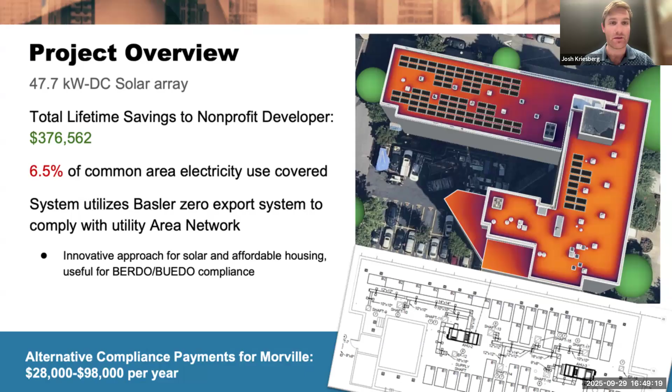So Josh, I could talk a little bit about this piece. The total project cost for us is $242,759. Now we've already secured a federal tax credit for half of that, so we got it for $121,379, just leaving us with the other 50% of the cost. Now the amount we're requesting from the fund is just a few thousand more than the remaining cost of the project itself, and that's really just to cover the overhead, the small amount of time that Episcopal City Mission and Morville staff will need to manage the project.

Now, before we jump back into another technical slide, let's talk about the recipients of these efforts, the tenants here. We currently have about 230 residents in the building. This project, all the energy from the system is going to be used to offset the common area electricity in the building. Per the bonus tax credit, we're required to distribute a portion of that energy output to tenants. So Episcopal City Mission is going to be contributing extra monies into the building's operating reserve to accommodate for this.

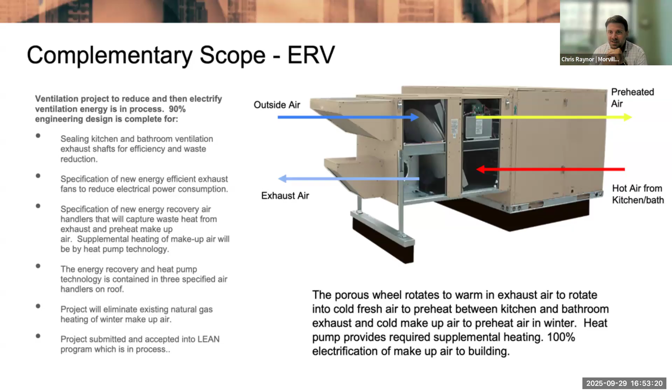As Josh already mentioned, we have got our low-income bonus tax credit awarded already, and the interconnection service agreement received from Eversource. We've already had smaller projects going on, window sealing and rehabilitation, but this project, the solar in particular, is really going to be kicking off in early 2026.

I'd be remiss not to say thank you to the City of Boston and the BERDO board, and special thanks to Urban Edge for letting us move up in the queue here. Really appreciate it, and we're open for questions.

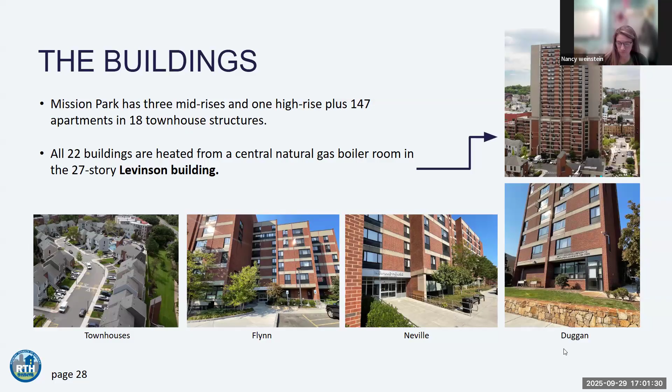Our project is obviously committing to decarbonization. We've been working throughout this entire year with Greener U, Elevated Design, Building Evolution. We've completed a deep energy retrofit composed of multiple pieces of the puzzle. The one we're here today to motivate, in part by BERDO, is keeping our energy moving in the right direction to fulfill the future equations of being net zero. Our deep energy retrofit has assisted in identifying and analyzing the energy emissions, provided opportunities to plan for decarbonization strategies, and laid the groundwork for short-term, medium, and long-term pathways. We've been working diligently laying out an entire plan with short-term and long-term items. This is one of our shorter-term items that we think we can get done fairly quickly.

So I'm going to turn it over to Mark, who's going to go through the details of our project, which again is on top of that high-rise building, the Levinson building.

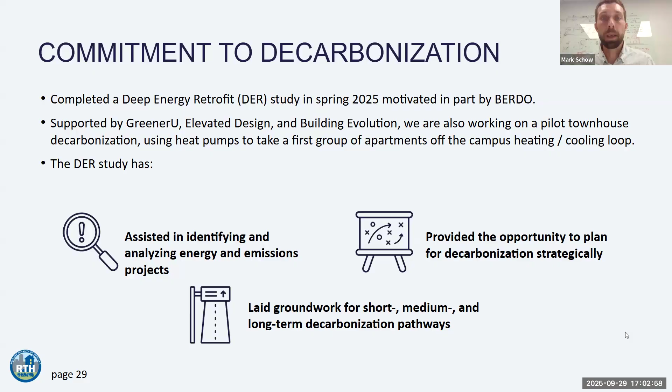Hi, my name's Mark Schow, and I'm an engineer. I'm the owner of Elevated Design, a firm focused almost exclusively on decarbonization, electrification, and reducing our impact on the earth.

The advantages of this project are that it's going to lower the boiler combustion, so we're going to have less direct combustion of natural gas on site, which results in lower CO2 emissions. There's also an added benefit of improved tenant health and comfort, which we'll talk about in the next slide.

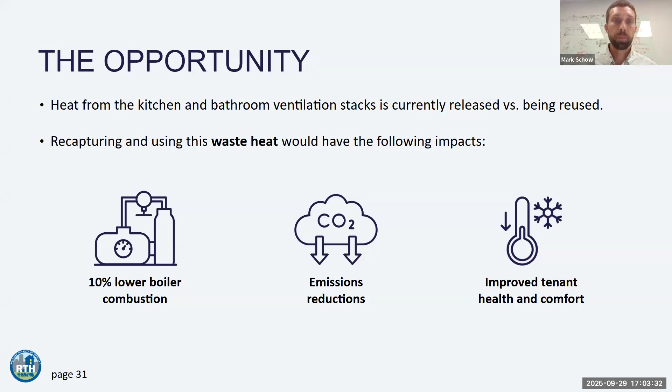We have inadequate heat now. We don't know exactly what happened, but about 15 years ago a new boiler plant was put in, and it was a little undersized. So when they get to the absolute coldest days of the year, they're not able to provide enough heat to the entire campus. It's one boiler plant that heats all of those buildings. As a result, they have to turn off the fresh air supply to that high-rise tower at the coldest possible temperatures. They still have exhaust, so the fresh air doesn't go down entirely, but it results in draftiness, with fresh air sucked in through individual cracks at each window and tenant, making it a less comfortable experience and also not very efficient.

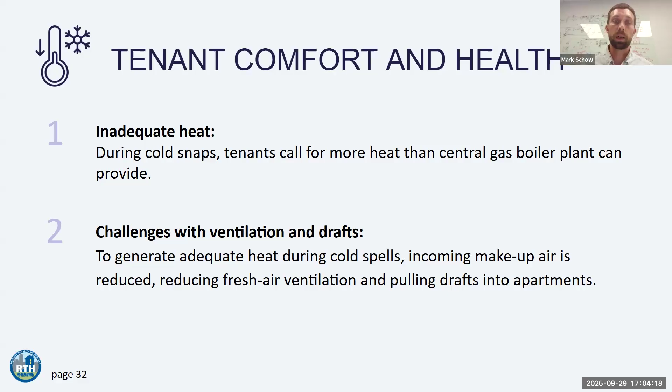We have come up with a solution that will decrease carbon burning on site and also increase the total capacity of the boiler plant.

So you can see this photo on the left, which shows all the exhaust fans poking up there. Not a very zoomed in photo, but you can still see those exhaust fans. I wish we had a photo from the winter time, because you'd see snow on the roof and complete melting all around these exhaust fans. They are throwing away 70 to 75 degree air every single hour of the year. That is all the toilet and kitchen exhaust, general exhaust for this building.

And the photo on the right is our proposed solution for this, and that is to recover that heat and deliver it to the fresh air intake. So that big louver you see right in the middle is the fresh air intake, just a few feet away from where we're throwing away all this heat. We are bringing in fresh air.

But the problem is, in a new building it's very easy to make those work, but in a retrofit application it's very difficult. So we have a proposed process for recovering that heat from the exhaust and moving it in there, which increases the total heating capacity of the building and decreases combustion.

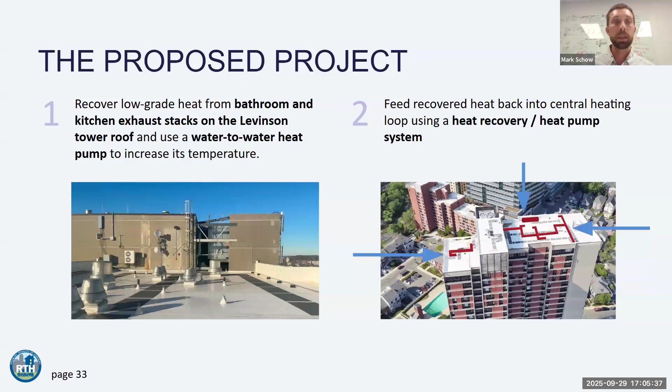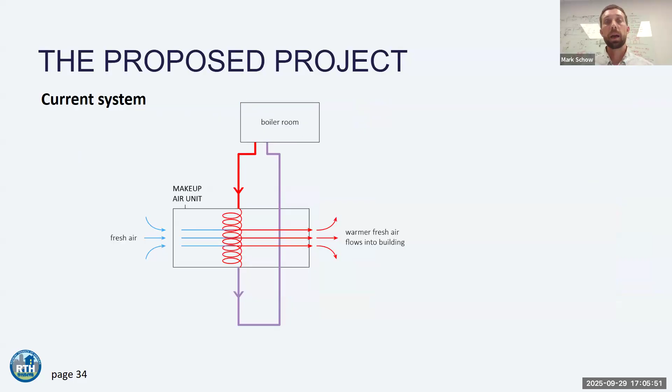So, next slide. This is a simple diagram of the current scenario. You have a boiler room down in the basement, and it is just bringing warm water up and treating that fresh air. Next slide. We're still going to have that system in place as a redundant backup.

You can see that in the gray lines. But what we're going to do is add these coils throughout so that we're able to capture that heat. This has been done for a long time, it's called a runaround loop. But they're not very efficient and they're very expensive. With the cost of BERDO penalties going up, we have increased capacity and increased incentive, and with the addition of a water-to-water heat pump, that allows us to boost the temperatures.

So this actually looks an awful lot like a geothermal system. Rather than going to the ground to get heat out of the ground, we're just taking the heat right from the top of the high rise. We're grabbing that heat just before it gets exhausted to the atmosphere.

Next slide. I think I'm almost down to my one minute margin, and we are back to Nancy. So you've got just over a minute, Nancy, to close it out. Oh, I'm sorry, this one is mine.

So anyways, this supports part of our net zero over time strategy. We really just wanted to focus on the fact that we're not just making a boiler system more efficient. Even when the boilers are all turned off, this system will still be part of the future energy. We don't know all the paths we're going to take over the next 20, 25 years, but we know this system will be part of the final solution.

Okay, next slide. Oh, I lost track of my slides, I'm so sorry. Anyway, so we have some economics here. This can be more of an appendix given that we're down to the last minute here.

But the project has grown in scope. We initially were very cautious and were going to do a more limited project, but we've proposed to expand the project. So we're still asking for the same grant from BERDO, but we are proposing to increase the scope and increase the total savings as a result.

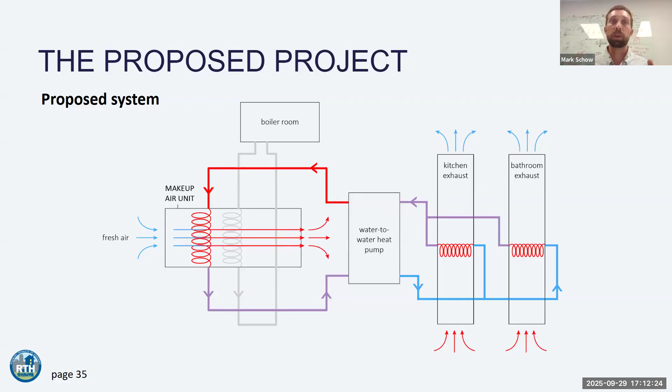If it's a warm afternoon and no one's taking any showers right then, that energy would just be lost and gone. But anytime there's a domestic hot water load or a heating load, this system would be able to support that. And unlike a traditional makeup air unit or energy recovery unit, which is always just getting a percentage of the difference between outdoor and indoor air, this one is able to get that same percentage regardless of the outdoor air temperature.

Thank you, Mark. I'll turn it back over to you, Chair.

Board member Lattimore: Yes, thank you for the presentation, appreciate it. I did want to understand — when you said that you expanded, it sounded like you're expanding the amount of either work or budget. So I just wondered if you could describe what that expansion means, how the building's budget of 36,000 relates to what you're requesting as well.

Yep, so the request has not changed. We were still requesting the $150,000, which our approach on this was a little bit more like a utility incentive, where we were looking for a small cost share. The building has 36,000 CFM of exhaust air and fresh air occurring all the time. Initially we thought maybe we'd only be able to access half of that air, and get a certain percentage of the energy out of it. But as the math came out, we were able to show the economics were doing quite well, so we continued to drive the system to be more advantageous and recover more energy.

So does that mean your total budget is higher than before? Correct. If we could go back onto that table — how are you funding the balance of a bigger budget? That's kind of what I'm trying to understand.

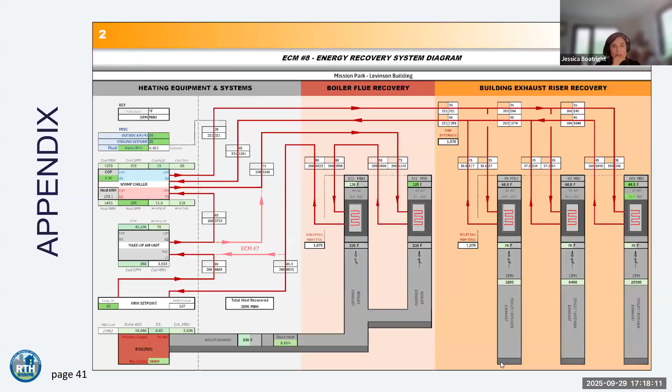Hi, good evening, my name is Caitlin Robillard. I'm the Director of Real Estate Development at Allston Brighton CDC. Thank you so much for giving us this opportunity to speak to you about the Hano Homes Deep Energy Retrofit in Allston. I want to note that I'm joined this evening by my colleague Mara Tu, who's a project manager on the real estate team. So she and I will both be able to answer questions afterwards.

Next slide. Before I get into Hano Homes, I wanted to give a little background on the CDC. We have set a goal to decarbonize our entire portfolio by 2040, partly because we really need to be ambitious and show the urgency here. We're always wanting to do our part to reduce greenhouse gas emissions, but a real central part of this is the health and comfort of our residents. We feel like offering fresh air ventilation, thermal comfort, central AC, those are big motivators for us. We're also committed to normalizing deep energy retrofits and showing it's not some fad and it's not impossible. It's a very viable path forward, and really tee up the affordable housing industry as a leader in this space.

The how is always trickier, of course, but a few things turned the tide for us here. One of which is BERDO. We really leaned into it. It's so great to have an ordinance that has teeth behind it, so that we could show leadership that we were going to be facing real fines if we didn't make upgrades.

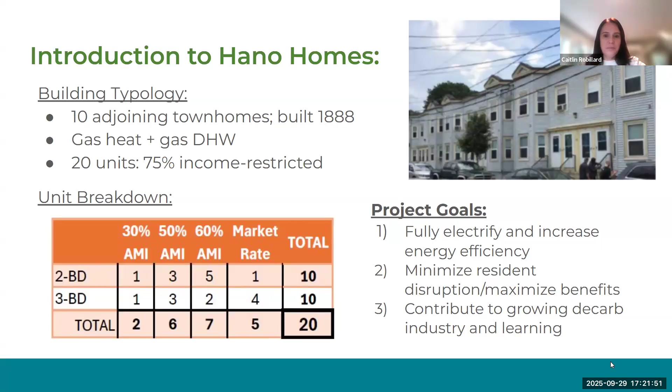So first goal: electrify, increase energy efficiency. I think arguably one of the most important pieces when you electrify is having a really well insulated envelope. So the design team and the contractors really knew what they were doing here. They demoed down to the original wood sheathing on this building and have this very thoughtful 7 layers of what our architects call a brand new winter coat that went around the property.

Including wood fiber, which is a carbon storing material, which was incredible to use on this. Of course, part of this was heat pumps for heating, cooling, domestic hot water, adding in ERVs for fresh air, and to help offset the increased cost from switching to all electric, getting rooftop solar panels on. Sustainable Comfort projected for us an energy use reduction of over 80% and an emissions reduction of 74%.

And now we're only about 4 months since we've had all electric systems throughout. Early data, though, is showing that we are definitely hitting these energy reduction targets. But after a full year, 2 years, we'll really be able to provide more of that data.

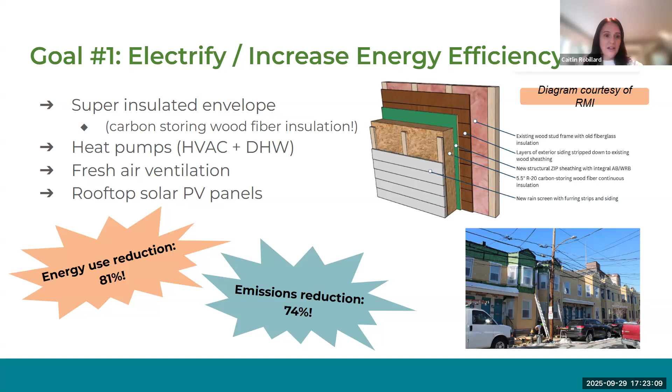Our second goal was to keep our residents front of mind for all of this, really minimize the disruption to their lives. Looking at 20 households, about 50 individuals who live here, and maximizing the benefits to them when they return to their homes. A 10-month occupied rehab is, of course, going to not be pleasant for everybody, but we tried our best to minimize that.

We had a great relocation team. We actually had the benefit of a couple vacancies opened up before we started. So rather than moving folks temporarily off-site, they got to just move into what we considered hotel units right on site, just a couple doors down from where they were living. And they got this interior work down to such a science that it was just 2 weeks that folks were out of their units at a time.

And of course, with the relocation consultant, the packing and the moving and the storage and furnishing the hotel units, that was all taken care of. Benefits to our residents: all of the utilities here are owner paid, so there's no cost burden on going all electric for our tenants. This property is actually right next to the Mass Pike and one of the commuter rail stops, so air pollution and noise pollution were real factors that we were able to address through this project.

And then, of course, the thermal comfort. So the residents now have control over the heating and cooling of their units. These ERVs give them fresh air, filter out pollutants, and provide dehumidification and humidity recovery as needed.

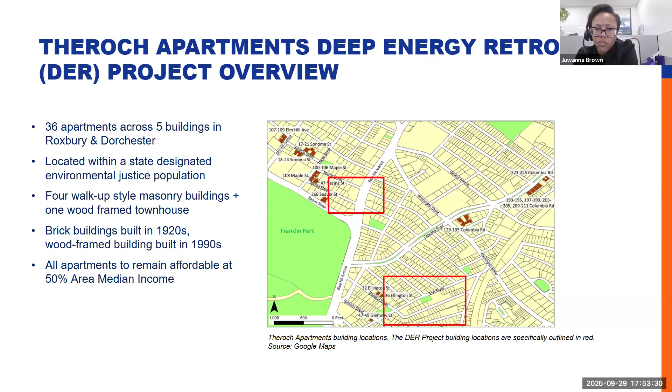So basically, collectively, we have this vision, and our vision is to deliver healthier and more efficient buildings that residents will still be proud to call home, that are aesthetically pleasing, and that maintain housing stability. The problem is that because of the age of the buildings, they have older, inefficient systems that emit considerable emissions and don't meet city and state standards. And so our solution is really to electrify the building systems to reduce the reliance on carbon, reduce energy consumption, and improve building air quality.

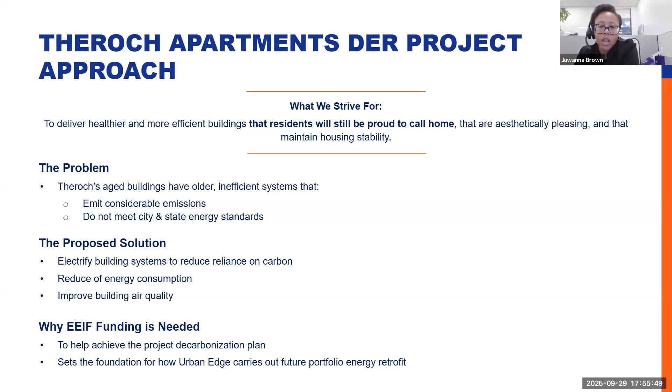So this is how we approached our scope of work. We pulled our team together and we basically said, if we are going to be going through a rehab, can we use this as an opportunity to the greatest extent possible to decarbonize these assets? And so we asked ourselves this question. We said, what are the energy conservation measures that we can implement that will get us to hit a 50% or more EUI reduction from the baseline? And so our energy consultant did some energy modeling. We had some conversations, we did more analysis, and this is what we came up with.

So we plan to do building envelope improvements. For the brick buildings, we plan to do an exterior insulation finish system, or an EIFS system. So it'll be repointing and repairing of the brick and then installing a cladding system for the insulation. For the wood frame building, we do plan to replace the exterior vinyl siding and then install a continuous insulation system.

And then for all the buildings, we are planning for interior wall insulation, so it'll be a liquid applied air and vapor barrier.

We also are planning for new double hung triple glazed windows, weatherization, and basement wall insulation. The other piece of the puzzle, as you guys have heard in previous presentations, for these buildings, it'll be a new mechanical and HVAC system. Currently it's gas-fired boilers, so we'll be transitioning to all-electric heat pump water heaters, paired with a new VRF or variable refrigerant flow system. This basically translates into central cooling for the tenants.

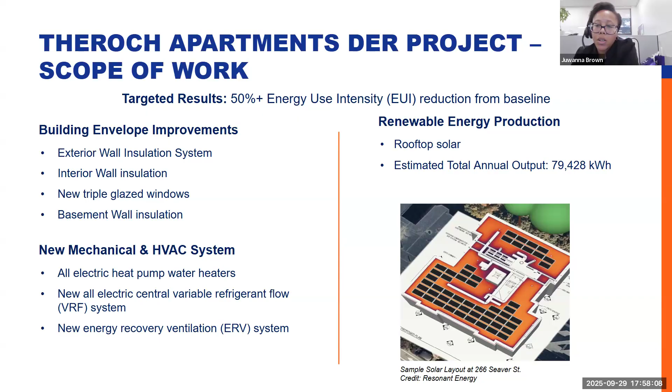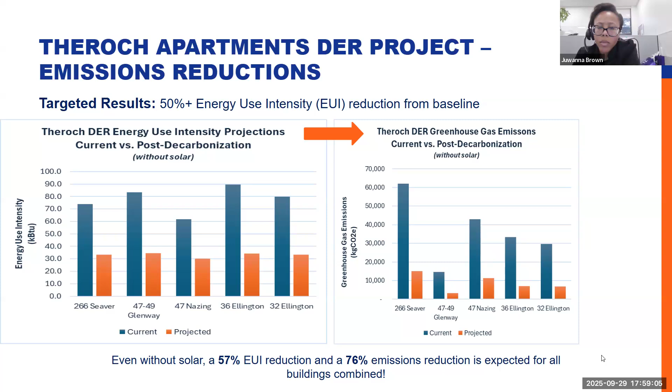As Urban Edge, our board is made up of a large percentage of people of color, so diversity and inclusion is important to us, and resident engagement is important to us as well.

The Theroch Tenants Association is 49% owner of Theroch Apartments, and we have a really good relationship with them. We provide them with monthly updates, consisting of both in-person meetings and monthly reports about the rehab. Our current engagement has also consisted of resident surveys, quarterly resident meetings where we provide updates to the general residents about the rehab, and we also engage in occasional coffee hours with residents too.

Because we have a dedicated in-house community engagement team, we plan to do one-on-one conversations and group conversations where we really educate residents about what it means to live in a decarbonized building, particularly for that VRF component, for the transition from not having central AC to having central AC. We have a really good relationship with the TTA board. They have been supportive of this process thus far, and they are aware of the decarbonization plans. We also plan to use lessons learned from similar projects.

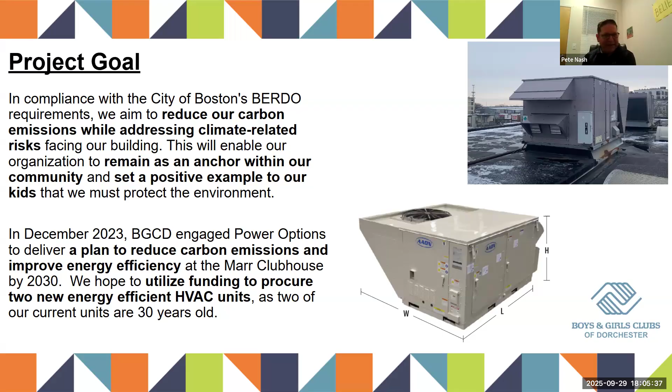With regard to the project budget, it has remained the same as in our proposal. Our overall budget is just over 261K, of which we're requesting funds of just over 136K, with the remaining 125K coming from Massachusetts rebates.

Thanks, Pete. As you can see, we're tag teaming here. Our scope of work is replacing the two rooftop units that sit over our gymnasium with two 25-ton AAON heat pump RTUs. Like our existing units, which are currently 30 years old, we've seen an extended life with them because of what we consider to be a solid maintenance contract on our mechanicals, and we hope to do the same here.

We believe this project will allow us to increase our energy efficiency and avoid any disruptions in programming for our members. We're excited that this system will basically eliminate most of the gas that has gone into the existing units. These will only fire up when it gets to a 30-degree temperature, as recommended by the manufacturer.

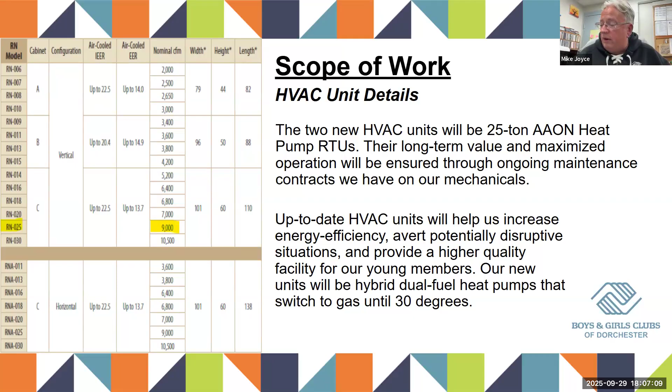This project, for us, is really just replacing the existing outdated HVAC units on the roof. It will be overseen by myself and DeJuan Sawyer, our facilities director, who has been with the club for 20 years. He's on the call, but he's my silent partner—he's letting me do all the talking.

We are going to be working with World Energy Services in assistance with DVM Industries. They've been working with us for several years on a couple of different energy efficiency projects, so we're excited to join them again in this potential renovation.

We've done work with World Energy on variable frequency drive additions to pumps in the building, and there was an LED retrofit of two of our facilities several years back. World Energy, by the way, is not a registered minority and woman-owned business, but in conversation it sounds like they just need to do that because they do qualify. So more to come with that.

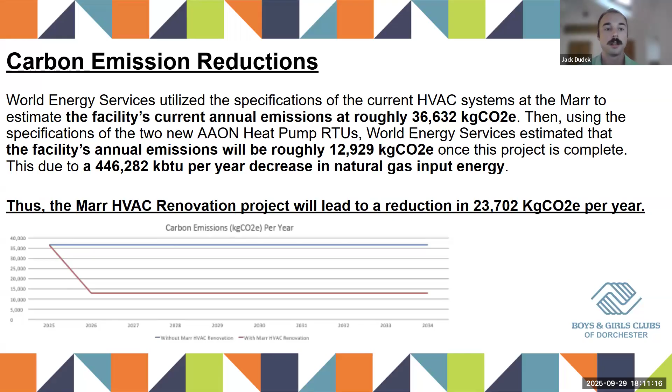So a little bit about the other half of what's supporting this project. The 2 total funding sources proposed would be this BERDO grant, if we're graciously accepted, and then the Mass Save commercial heat pump rebate. One quick update from the rebate within the last several weeks is that Mass Save indicated they're going to reduce the rebate by 20% for any projects submitted after October 27th and not completed by the end of the year.

So our goal is to have this submitted. We can submit that non-binding heat pump rebate application, get it in their hands so we make sure we remain at the same budget, and have this project completed, installed, and commissioned, fully operational by the end of 2025.

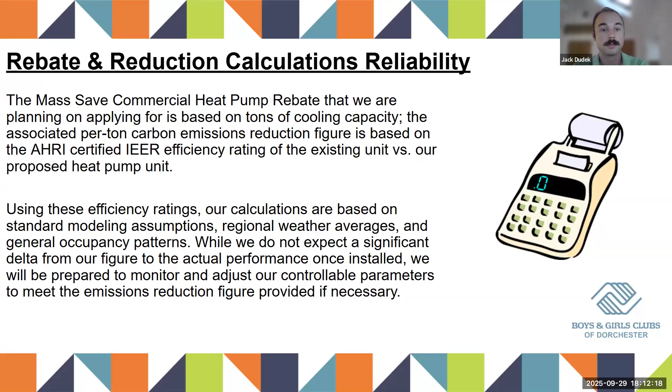As for any potential risks, supply chain is something we're always looking at right now, because, like one of your volunteers was saying, the economy the way it is right now, it's actually a lucky thing that the budget is the same as we submitted it for at the beginning of the grant process. But it would not be so in the future.

One direct reason being, like I said before, the heat pump rebates will be changing by 20%. That means their $125,000 would become $100,000. So this is a window of opportunity for them to get the latest and greatest electrification heat pump technology at that full rebate amount right now.

Another potential risk is, as Mike and Pete were saying, these are 30-year-old units at end of life. Their own third-party HVAC service technicians have been telling them to make plans for this. So this is a perfect time for them to get new units that would make them compliant with BERDO and avoid any disastrous disruptions if one of these units failed. This is critical for the organization, and it would bring them into BERDO compliance.

So we saw it as a great application and fit for this grant. And I think that wraps up the slide here. If there's not anything else that Mike or anyone else from the team wants to say, then we're ready for questions.

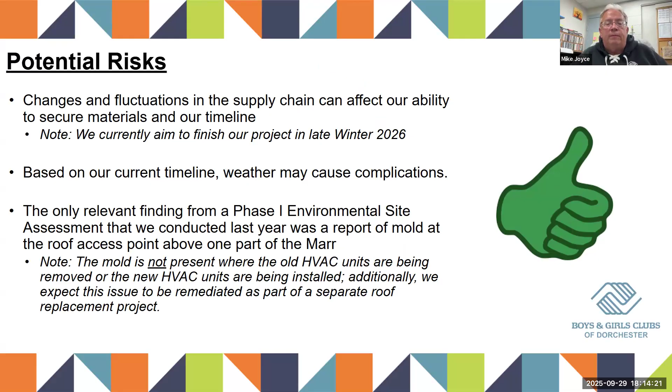Thank you. So I'm going to open it up to board members for questions. I do just, before I call on board member Stovall, I have one question from me.

Understanding that weather is a risk factor, if for some reason your application was in October and you were ready to go, but the start was delayed because of an unforeseen weather pattern, would that compromise your ability to use those funds? Or if you're making best efforts, are you still protected in being able to execute on the project? That's a good question, Jessica.

I would say that we would still be able to get it because we work directly with the utilities, with National Grid, with Eversource, with Mass Save, and the individuals we go back and forth with to get these approvals. There is a certain amount of reasonability and flexibility in situations like that.

And the labor for this project will not be long at all. So even if there was a very long spell of harsh weather in the winter, we would expect that we could certainly get the work done by the end of this year, regardless of any extreme events, because it won't be a long construction timeline or process at all. It will mostly all get done in one or two days.